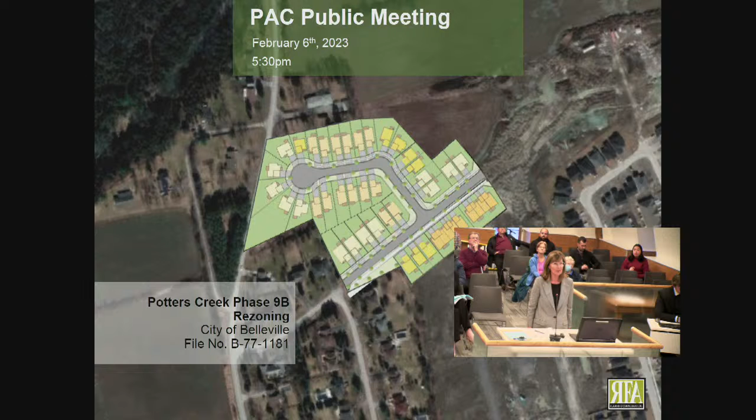I have a very brief presentation about this rezoning application, so I'd like to go through that right now. Potters Creek is a subdivision that was draft approved in 2008, and the rezoning is for Phase 9B, which is the very final phase of the original draft approved plan.

Overall in Potters Creek subdivision, there are just over 900 dwelling units, so it's a large subdivision. It's taken over a decade to completely build out. The rezoning for each phase has occurred, so there's been multiple opportunities and considerations by the Belleville Planning Committee for each phase as it's been built and proposed. Phase 9B was delayed because of the desire for an overarching traffic study for the West Belleville urban area, which occurred in 2021.

This land is within the urban serviced area of the city of Belleville. To the south and east are residential lots within the Potters Creek subdivision, where Phase 9A is now in the building process. To the north are lands to accommodate a future roundabout connecting Sienna to Avonlough. To the west are existing low-density residential uses, particularly the Hastings Park subdivision, developed by Sidney Township in the late 1970s with municipal water service supplied by the city of Belleville, and since annexed by the city.

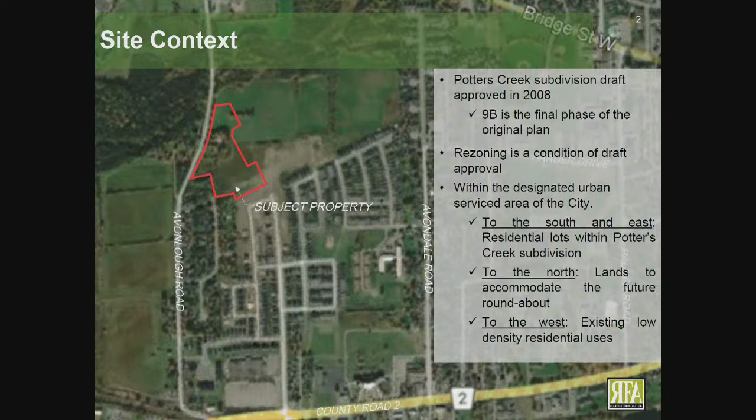There was a pre-consultation process reviewed by City of Belleville staff that occurred in the summer, and we filed the applications in November. It was deemed complete December 15th. The applications, as you've heard from Andrew, include a rezoning application and a red line draft plan of subdivision, which this meeting isn't really to hear about, but I do have information about the draft plan for the public and for the planning committee. We filed a planning justification report, a development site plan, and draft plan for those applications.

WSE Consulting also filed a series of technical reports requested by the city dealing with servicing, water and sewer, stormwater management, and traffic calming measures. There was also an overall traffic study done by Azura Engineers in 2021, which looked at both the Potters Creek subdivision development and the Avonlea development, a subdivision to the west extending towards Walbridge Loyalist Road and the Christian School. That's approximately 700 units, which has been draft approved and rezoned.

Turning briefly to what's proposed with the subdivision for Phase 9B: this slide shows the layout, with boxes representing building envelopes for single detached dwellings and some townhouse units. Originally in 2008, it was a smaller piece of land for 22 single detached units. Additional lands to the north have been added, essentially the entire cul-de-sac area, which is why we're amending the original approval. That's about 1.6 hectares added to make the subdivision larger. The new plan is for 44 units, 35 of which are single detached, so the majority are single detached homes. There are also 9 one-story bungalow townhouse units, shown in orange at the lower right corner, which will back onto semi-detached units in Phase 8 of Potters Creek.

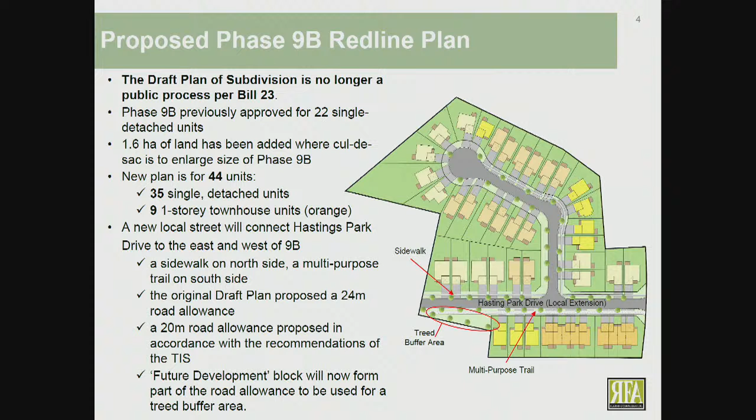WSE outlined a series of traffic calming measures in their report, summarized on this slide, as recommended in the traffic impact study. The connection of local street A to Hastings Park Drive is carried forward as recommended, and there's a new roundabout connecting Sienna and Avonlough Road to the north. The traffic calming measures are intended to ensure Hastings Park Drive within 9B remains a local road. As recommended by Azura, Hastings Park Drive will have a traffic hump or speed hump at the terminus of the new street before connecting to the existing Hastings Park Drive, along with speed control and stop control signs to alert drivers to slow down and stop more frequently.

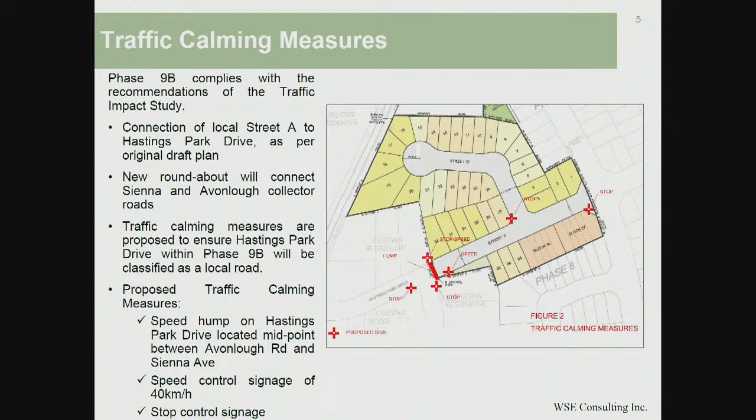Turning briefly to the provincial policy statement, which all rezoning applications must be consistent with: Potters Creek subdivision is within the Belleville Urban Serviced Area, which is to be the focus for growth and development in the city. There must be sufficient servicing available, which there is, as proven through the submitted engineering studies, with logical extensions from existing servicing in previous phases of Potters Creek subdivision to accommodate all required infrastructure. It is a logical progression in the final phase within Potters Creek subdivision, and it will contribute to the city's supply of approved land that is zoned and readily serviced for subdivisions.

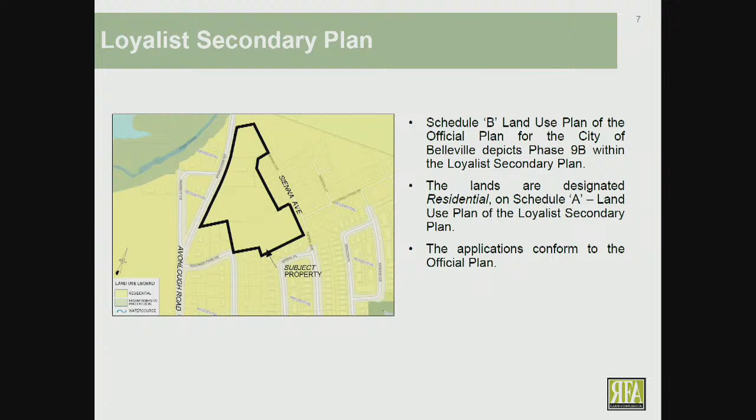We've worked with city staff to develop a zoning category that anticipates the provisions in the new City of Belleville zoning bylaw. As you're probably aware, the city has been updating its zoning bylaw for a number of years and is coming towards a conclusion of that process. They are creating new zone categories so that this land area under consideration for rezoning would fall within the terms of that proposed category.

This is an R3-X zone, which permits singles, semis, and towns. This also brings forward recommendations from the provincial government's Bill 23, including a new definition of townhouse dwelling. For those newer to the Planning Committee, the Belleville zoning bylaw dates from the early 1970s, and there's a lot of updating occurring, including a more modern definition for townhouse dwellings to permit various modern forms.

City staff recommended that some remnant parcels, which were in the old rural residential zone category, be contemplated for future development subsequent to 9B. There's an additional remnant about 1 hectare in size that will also be zoned within this same category, shown just to the north of the subdivision for 9B.

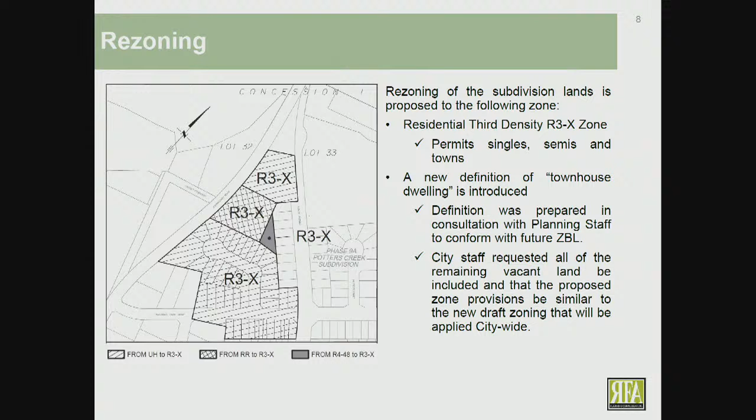We've had extensive consultation with the owner of 27 Hastings Park Drive, initiated on January 26th at City Hall. Some members of planning staff were able to attend; I myself was not there, but Adrian Bax, our client with Potters Creek Developments, was in attendance, and since that time we've been having ongoing discussions with the property owner.

I've been very involved in those conversations and emails back and forth, and I wanted to outline for the Planning Committee what was discussed at the meeting at City Hall, which has since resulted in some modifications to the draft plan of subdivision. Unfortunately, Adrian Bax is out of the country and wasn't able to attend, but he has been in touch and working with us throughout the process.

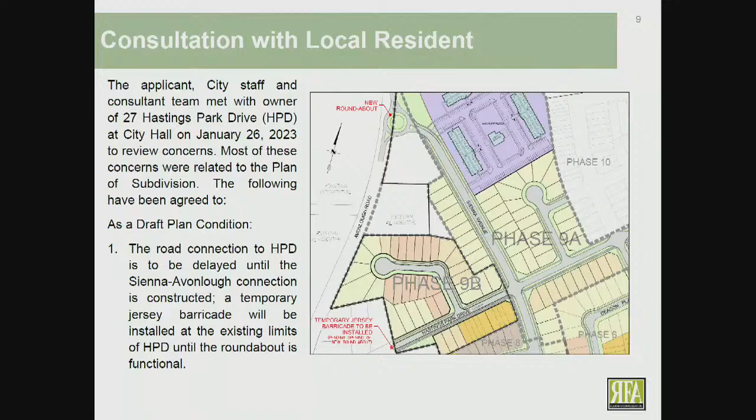There are other changes shown on this next slide, all related to the subdivision, which I thought would be beneficial for the committee to understand regarding agreements between the developer and the resident immediately abutting the subdivision. There's an easement on lots 22 and 23 that's agreed to be moved, creating more separation distance between the house on lot 21 and the corner of 27 Hastings Park Drive. There have also been adjustments to the rear lot lines in this vicinity, reducing the number of property owners abutting 27 Hastings Park Drive to two: lot 20 and lot 32.

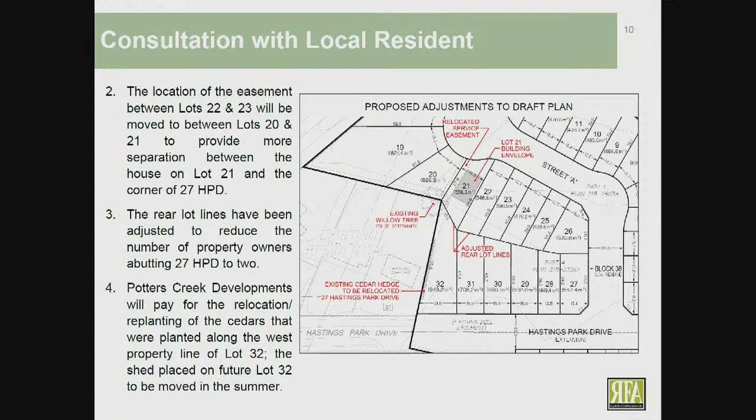They're both larger lots. Potters Creek Developments have agreed that they will pay for the relocation and replanting of cedars that were planted along the west property line of lot 32, and a shed there as well will be relocated. So those changes are all shown in red on that slide.

Finally, there was significant discussion about preserving an existing willow tree, and this is a detailed outline of what has been discussed. It's certainly the intent that the other changes will help separate the distance between the existing willow tree and the future dwellings on lots 20 and 21. The intervening space between those buildings and the tree would be backyards and gardens, which should not impact the tree. It was agreed, though, that an independent arborist would determine the location of the tree, its related drip line, and the current health and lifespan of that tree would also be established.

So this would occur this spring. And then the building envelopes in the adjoining lot would be staked out, and a mitigation plan would be formulated if warranted. If, in the opinion of the arborist, the construction activity related to the new homes on lots 20 and 21 abutting this tree would cause it to die, the developer has agreed that he will replace it with a 12-foot high conifer tree.

And then finally, there's some additional conditions related to future homes and future homeowners and pools in the backyards of lots 20 and 21. So those are things that were discussed, as you can see, in quite a bit of detail over the past week with that property owner.

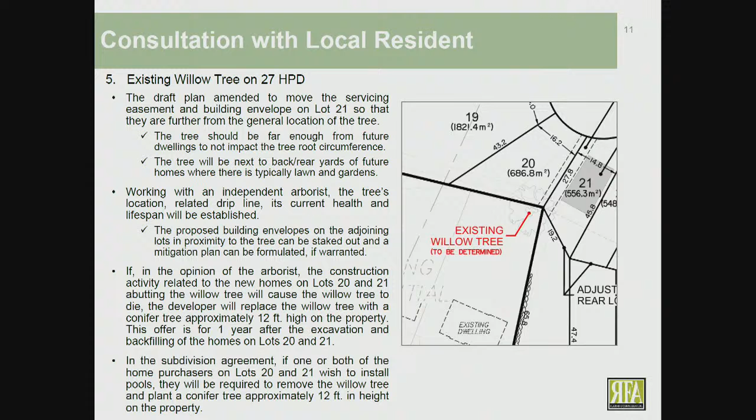Just wanted to conclude in summary that the rezoning is for the final phase of Potters Creek subdivision that was approved in 2008. There will be future phases to Potters Creek, but they will go through a separate subdivision process. This is for 44 residential units, primarily single detached dwellings. The rezoning is consistent with the provincial policy statement, it conforms to the planning policies of the Loyalist Secondary Plan, and finally, it implements the recommendations for the traffic study for the Belleville West community. That concludes my presentation. Thank you.

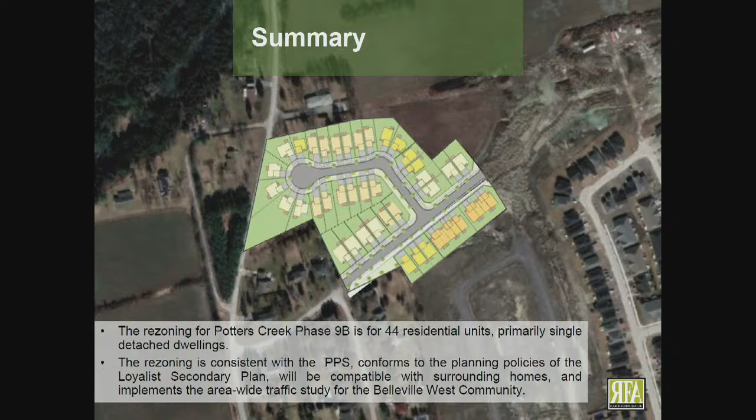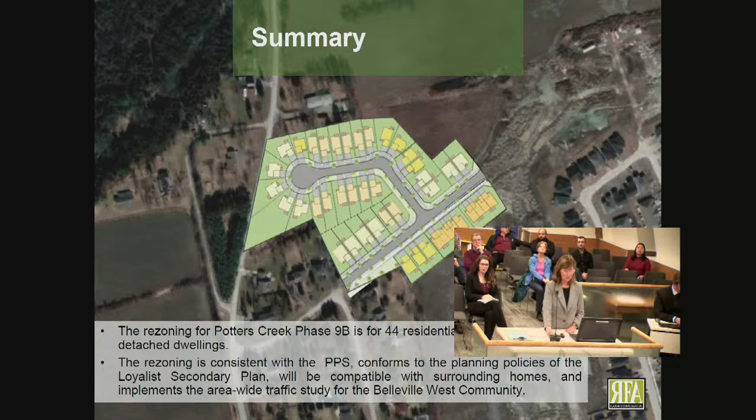If I may, I'm assuming, I hate to assume, but is it safe to say that construction access to this redevelopment would be off Avonlough Road, not Hastings Drive, as the big trucks and all that come in and out?

Just ask Adam Wilson to come up from WSE to answer that question. Yes, that's correct. The access would come off Avonlough. There's actually an existing construction route already to the north. We would leave it in place for the duration of this work.

Perfect, thank you. Councillor Millett. Thank you, through you, Chair Ruth. The traffic calming, proposed speed humps on Hastings Park Drive. We don't have speed humps elsewhere in the city. Has this been discussed with our staff that we're now going to create a policy whereby we're going to use speed humps?

That's a good question, Councillor Millett. And it's recognized that those don't exist elsewhere in the city. They were recommended in the 2021 traffic report. My understanding, and perhaps this is best directed through staff, is the city doesn't have a complete streets policy yet that would also deal with traffic calming. In our planning report and in the WSE report, we talk about traffic calming and different ways of designing streets so that they do slow down traffic. There are many, many ways that this can be done. Speed humps are one of many ways. At the end of the day, this was what was recommended in the 2021 traffic study, and in the absence of any more comprehensive city policy, it's one that can be done for, I suppose, at this point.

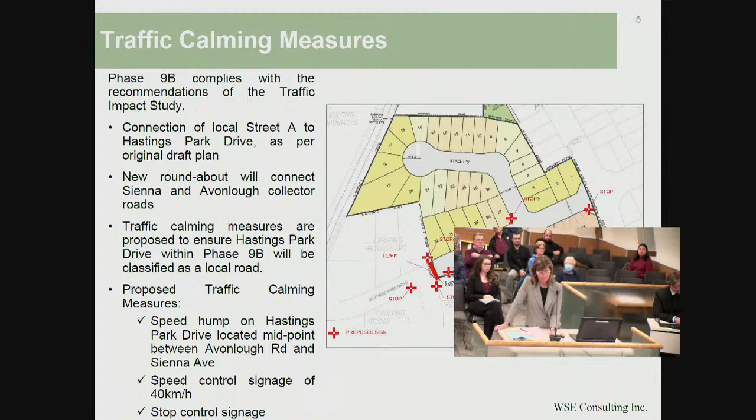Because in the justification, we're talking about trying to slow down and minimize the amount of traffic at that location. How critical is it to be opened up versus made into a cul-de-sac, a walk-through area, similar to what your developer did up in Settlers Ridge on Thurlow Drive?

I'm going to perhaps defer that to city staff. We are following the lead from city staff in terms of a general planning principle, the desire of the city here is to see connectivity between neighborhoods and not have a lot of dead-end streets. That's the key thing. This is to serve just the local immediate neighborhood, not intended to service the overall neighborhoods of Potters Creek and Avonlough. That's the purpose of Sienna, Avonlough, and the roundabout.

Okay, so maybe I'll defer that question. But according to the traffic study completed under your contract, stop signs are being recommended as a way to slow traffic. Now, I sit on our transportation committee, and the Ontario Traffic Manual is very clear that stop signs aren't to be used for the purpose of slowing traffic. They're there to control traffic and flow. So I'm curious why the traffic study would be recommending stop signs when that's contrary to what the Ontario Traffic Manual would suggest.

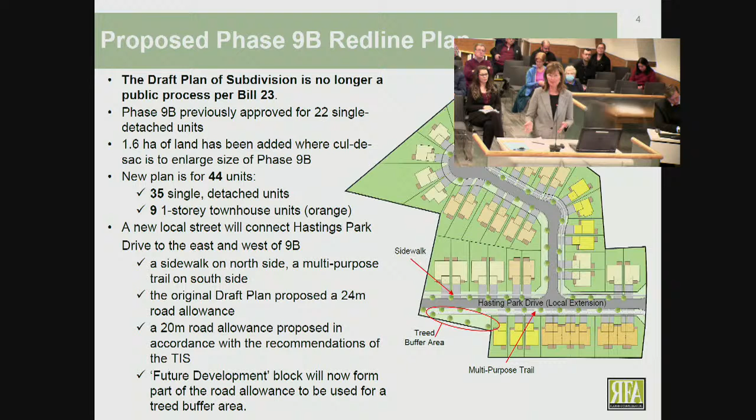That's also a really good question. As each subdivision is developed, you often would have a scenario where it may connect to an area that wouldn't have a multipurpose trail, but then the city would in the future provide that connection. As each phase of development is constructed, it's important those services be put in place, including the multipurpose trail, planned ahead of time. Then as the city, at whatever point it looks at Hastings Park Drive and provides services and road reconstruction, for example extending sewers there, at that time as the roads are reconstructed, they could then implement the multi-purpose trail through Hastings Park Drive.

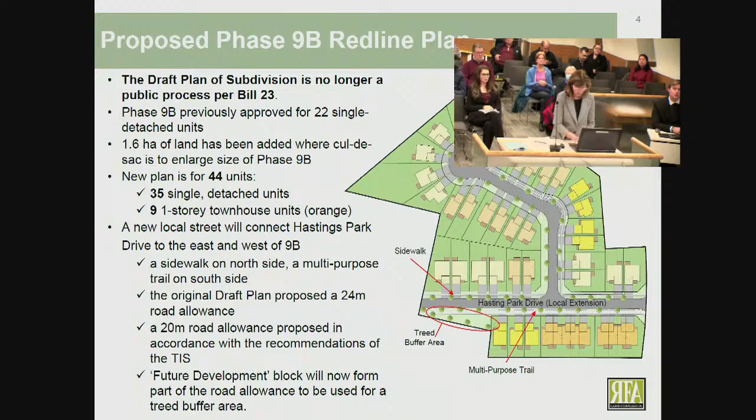Sorry, I'm just trying to exit here. I'll just keep running the meeting here. You can struggle with it. Anyone wishing to speak in opposition? Yeah, okay, sorry, I'm just getting out of this. Thank you.

If you could activate the microphone there and state your name for the committee, please. It's Christopher Destin, I'm the resident at 27 Hastings Park Drive. Opposition is a strong word. I'm not really here in opposition, but I'd like to make some comments.

I've been working with Potters Creek Developments and RFA planning over the last few weeks, and the meetings have been very productive and many concerns have been addressed. Those agreed upon provisions are detailed in the letter that I sent to you last night, and I've been told to become a part of the submission and part of the plan of subdivision.

As I understand it, the focus of these meetings could be restricted to only a discussion on zoning, as this is really just an application to change the zoning of these lands, and that there really is no official forum for the public to discuss concerns related to subdivision applications themselves. So I'm really appreciative and grateful that we still have a community that values public input and is willing to consider it, even if the regulations of our current provincial government no longer do.

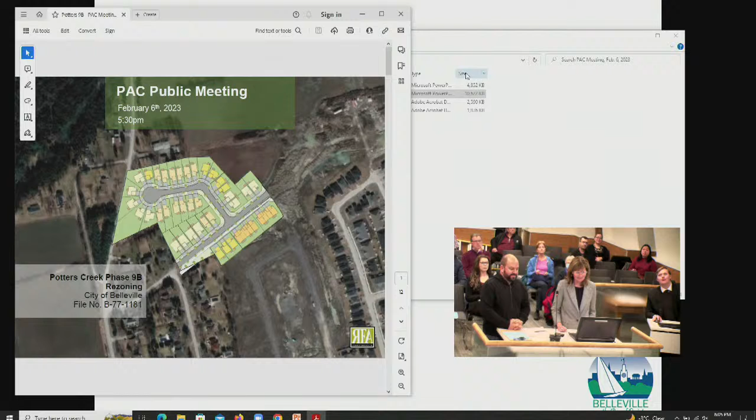Good evening, my name is Sebastian Mitzi. I'm principal with Signature Communities and Neighborhood Better Living. We are the owners of the site in front of you today. I just wanted to take a brief opportunity to say our group of companies celebrated 50 years on Friday, and we've been doing development and construction for many, many years. This project has a special place in our heart, and we're excited to be part of a team that can bring and fulfill something that is a real dire need in our province.

The second thing I wanted to say was I wanted to thank staff. In my 20 years of doing this business, I've never had the support that we've had recently from the City of Belleville staff. I'd be remiss if I didn't share that with the committee today. Other than that, thank you so much, and we're here to take any questions. Ruth will take over. Thank you, Sebastian.

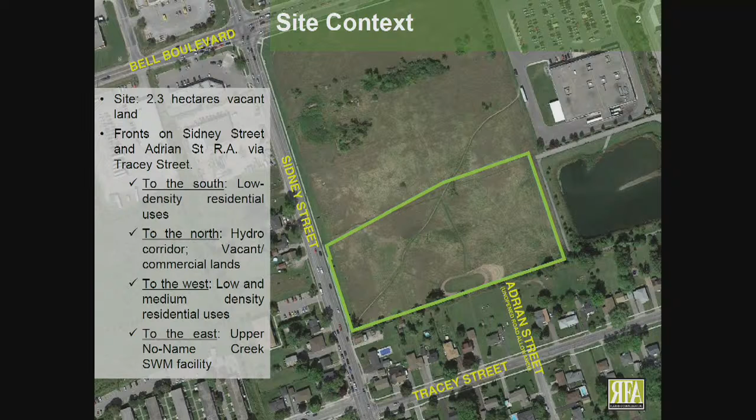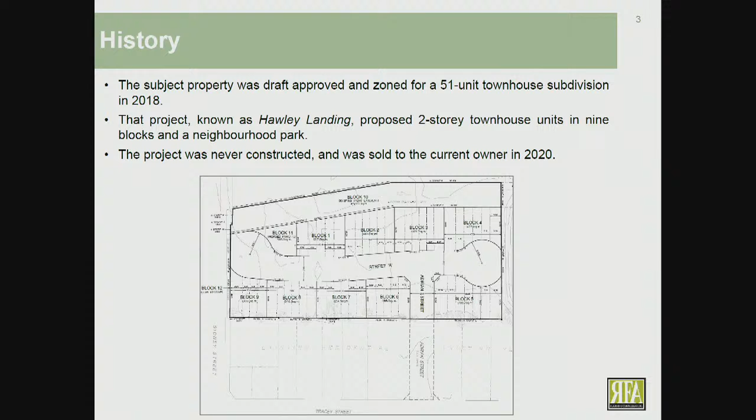As referenced, this was approved as a 51-unit townhouse subdivision in 2018. This is a picture of what that subdivision looked like—it proposed to extend Adrian Street, the unopened road allowance, and create a new east-west street from there. These were freehold townhouses. Adam and I were involved with that project, known as Hawley Landing, and the zoning at that time was also approved by City Planning Committee and Council. It was never constructed, and then Sebastian's company purchased the property in 2020.

That's how he came to meet us, and we were able to carry on and work with him on his new project. There's been a lot of pre-consultation, with the formal pre-consultation with municipal staff on August 3rd, 2022. We filed the applications just before Christmas, and they were deemed complete on January 4th. We also held a neighborhood information meeting on January 24th at the Parkdale Community Center.

This slide shows the draft plan of subdivision. It's not formally part of this public meeting process because of changes to Bill 23, but it shows how the land would be subdivided into various blocks—8 in total. It features a long-term care facility on Block 8, the larger of the blocks. There are 6 townhouse blocks fronting onto a condominium road and amenity space, which is Block 7. Then there's a parkland block, Block 9, the same as was previously proposed in the lapsed draft plan of subdivision.

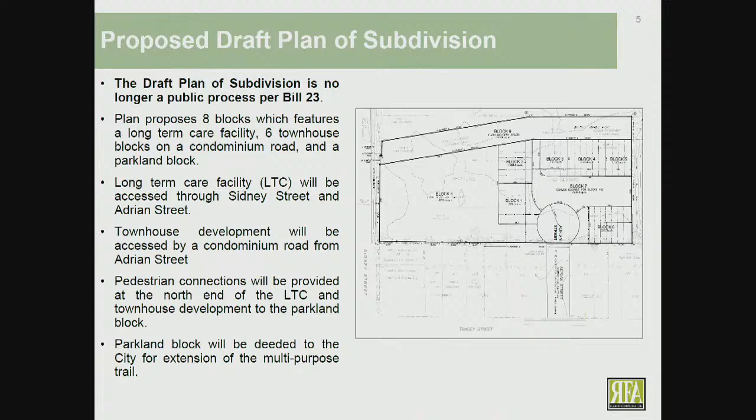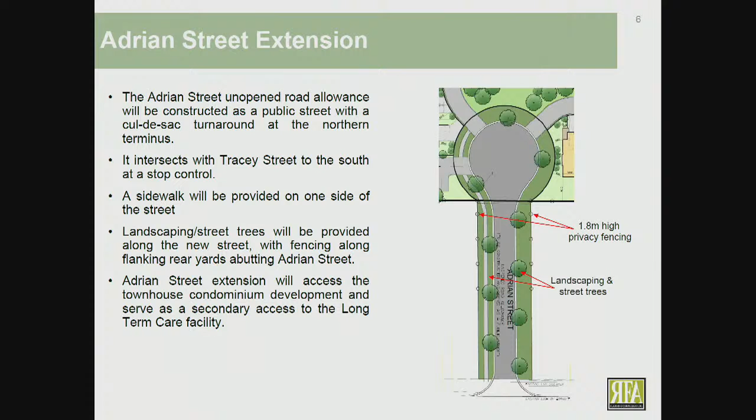This slide shows a detailed conceptual design for Adrian Street in the unopened road allowance. It'll be constructed by the developer as a public street with a cul-de-sac turnaround at the northern terminus, and a stop sign at the south end with Tracey Street. There'll be a sidewalk on the west side of the new street, connecting to the Tracey Street sidewalk and into the subdivision and long-term care block. There will be landscaping and street trees along the new street, and as with Hawley Landing, there's a requirement for 1.8 meter high privacy fencing extending down both sides of Adrian Street to flank the rear yards of existing homes. It will provide access to both the townhouses and the long-term care facility.

Just as background, this site has received approval from the Ministry of Long-Term Care to grant a license to Signature Communities to build this facility in Belleville at this site. As many of you are aware, there are approximately 1,800 people on the wait list in need of long-term care beds in Hastings County.

This proposed long-term care facility will house 160 residents in 5 different units, each with 32 beds. It will have 96 private rooms and 64 standard rooms, with private access to each room and a shared washroom. The physical design standards will incorporate space to accommodate unique medical equipment, such as piped oxygen, dialysis, feeding tubes, and bariatric equipment.

Universal Care Canada is the management company. They are an approved operator and will manage the facility, subject to Ministry of Long-Term Care approval. They have existing operations throughout the province, and this facility will result in a reduction in wait times for long-term care beds in Belleville.

This slide shows an enlargement of the long-term care facility site plan. We are working closely with the architect, Sam Esposito, who specializes in these types of facilities throughout the province. It's a 5-story building with 160 beds, shown in the orange rectangular block, positioned at the north end of the site near the future parkland and close to Sidney Street.

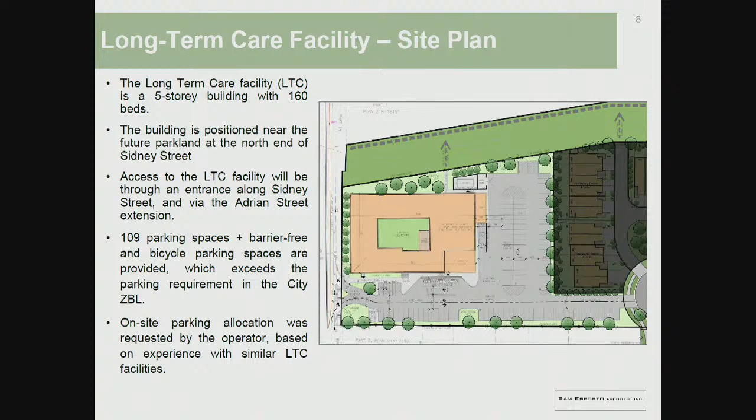Access will be through the entrance on Sidney Street, as well as to Adrian Street to the east. There are 109 parking spaces, including barrier-free and bicycle parking spaces. Overall, the parking supply exceeds the requirements of the city's zoning bylaw, based on what the operator requires for similar long-term care facilities. The building will also screen a lot of the parking from the public road.

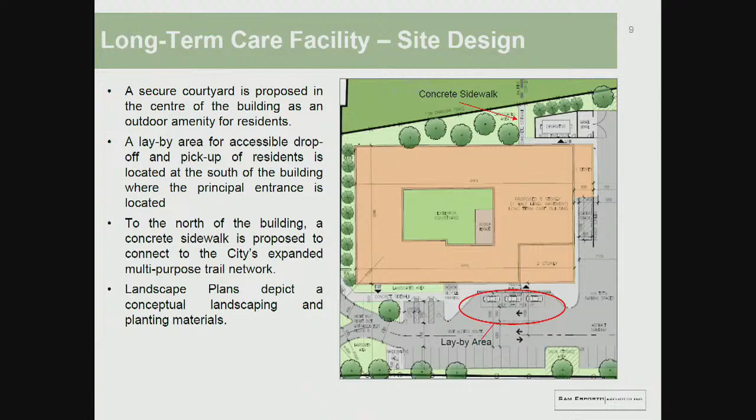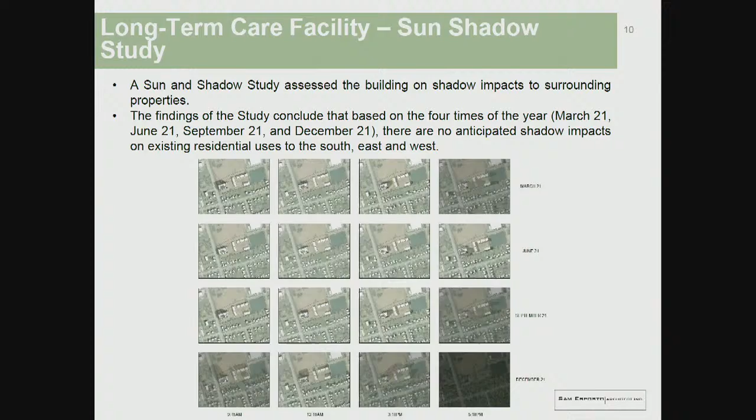There's also a requirement for an angular plane review, provided for in the Belleville new official plan, which is not yet approved by the province but has been adopted by council. This angular plane requirement applies from the side lot line where it shares with existing single detached residential development, with the line drawn at the lot line meeting a minimum angle of 45 degrees from vertical. The angular plane was drawn to the southerly property line at 45 degrees, and the placement and height of the building meets the planning criteria in the new official plan and is deemed appropriate.

In addition, to ensure the angular plane is implemented, there will be a 20-meter setback from the south lot line in the zoning bylaw.

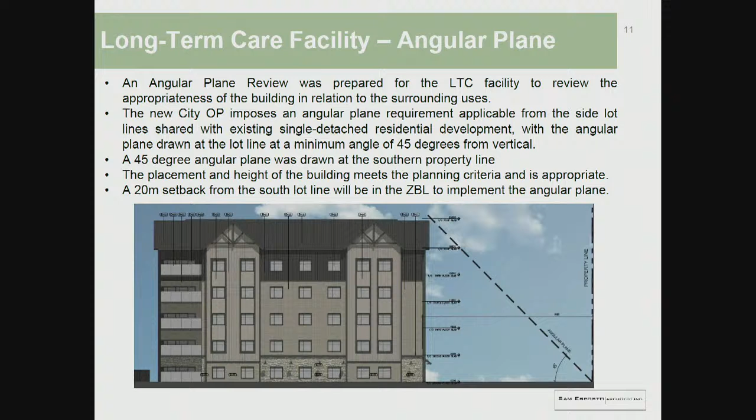This slide shows some of the elevations that the architect prepared, intending to create a building with residential character, maintaining a pitched roof, and utilizing building materials such as siding and stone cladding.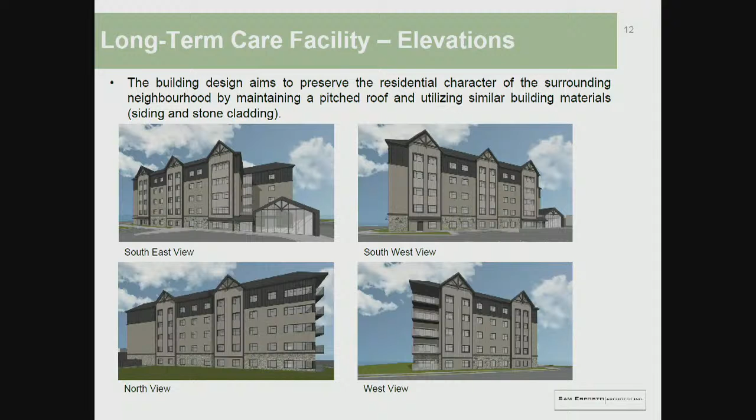Turning now to the townhouse development, Signature Communities will be the builder and developer of the townhomes. There are 34 two-story units proposed in 6 blocks. All units will be 3-bedroom units with 2 parking spaces, one in an attached garage. They are accessed by an internal condo road, which also includes visitor parking and amenity space, with a connection to the park block to the north at the end of the road.

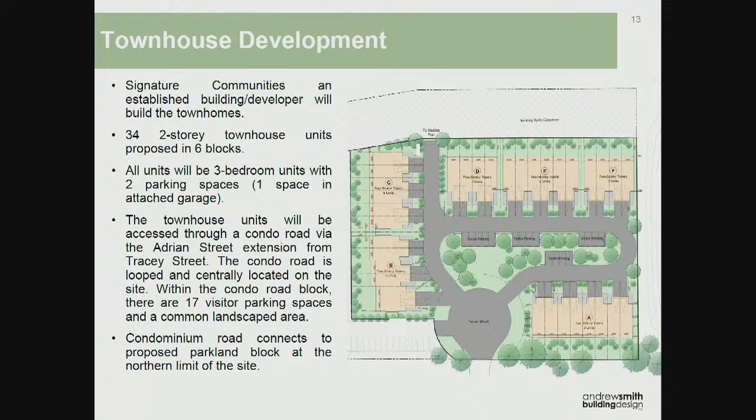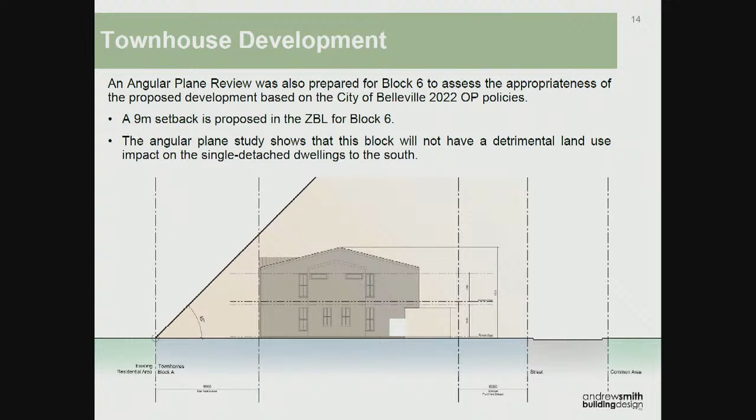Again, as with the other application, we've reviewed the provincial policy statement, and it is in the Belleville Urban Serviced Area where growth and development is to focus. It has full municipal services, which is the preferred method of servicing. It's designated residential, permits a mix of densities, and a variety of public uses are in proximity to the site. Our conclusion is the rezoning is consistent with the 2020 PPS.

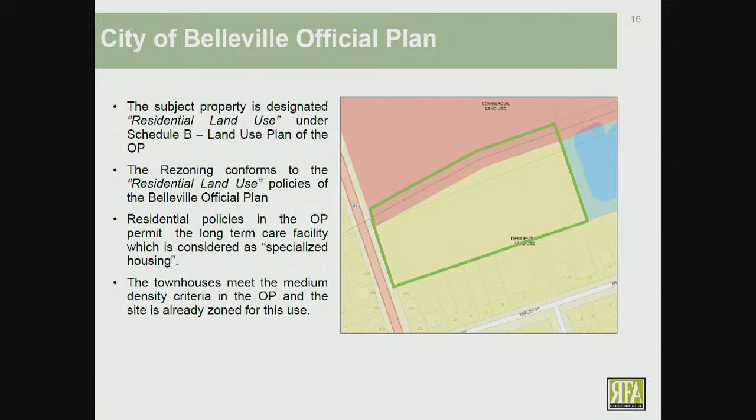This slide shows the Belleville official plan designation. The yellow is the residential designation, and it falls within that designation predominantly. The open space block—the pink—is commercial. It conforms to the residential land use policies of the Belleville official plan. In the official plan, specialized housing includes long-term care facilities such as nursing homes and retirement homes, so that falls within the residential land use designation. Finally, the townhouses meet the medium density criteria in the official plan, and the site is already zoned for townhouses.

These mainly deal with FSI, the floor space index. It's slightly more intense than what's in the existing Belleville zoning bylaw, which applies an FSI of 1. We're asking for 1.5, still not at the upper range. There are also some setbacks being requested so the building can be closer to Sidney Street than what's in the current nursing home zone, plus some other special architectural relief on setbacks.

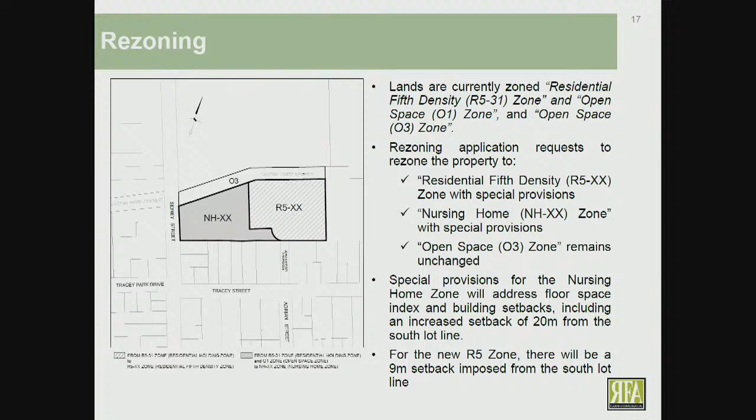There's also going to be a 20-meter setback for the nursing home zone from the south lot line to ensure the angular plane is implemented. And the same for the R5 zone—there'll be an increased setback to 9 meters along the south lot line.

As referenced, there was a neighborhood information meeting on January 24th held by the consultant team and the applicant at Parkdale, and there were 9 residents that attended the meeting. We've tried to very briefly summarize the comments, concerns, and responses.

There was a lot of concern, as I understand it, about Adrian Street, south of Tracey Street, as a result of some of the previous construction. I'm sure you may hear about some of that—I saw one of the written comments too about concern about the condition of Adrian Street.

There were questions about the form of the townhouses and what they would be like, so we had drawings there to show the residents that they are 2-story townhomes.

About the fencing along Adrian Street—this was a condition on the previous subdivision plan, and that will be carried forward to ensure there's privacy fencing along Adrian Street, so the abutting homes on either side have privacy in their backyards.

Drainage: there's a stormwater pond, as you saw on one of the first slides, for the Upper No Name Creek. This site will be designed so all storm flows go to that existing pond, which was sized for this particular site. Finally, there was a question about construction traffic, wanting to make sure it's directed away from Adrian Street.

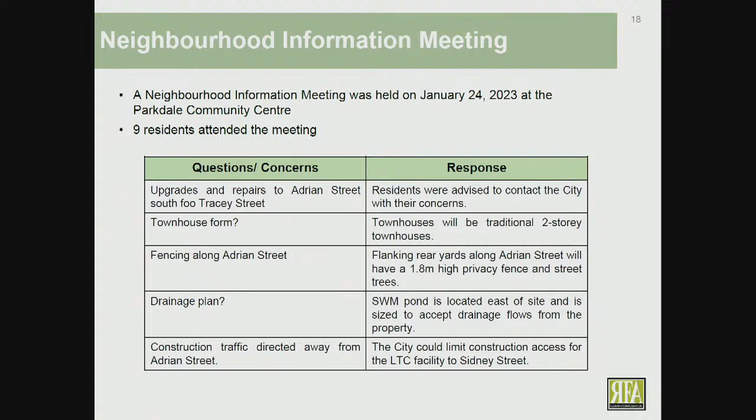There was also a comment with respect to a transformer from Habitat for Humanity, and this is a site plan detail. The transformer will have to meet municipal bylaws with respect to noise. There is a privacy fence that will be constructed along the property line, and the mechanical electrical engineer on the design team will be reviewing that further and providing further comments to the city.

That concludes the presentation for the rezoning. The rezoning itself will facilitate the approval of a long-term care facility that is needed to help serve the city's aging population. It is very similar to a rezoning that was previously approved for townhouses on this site, and there have been adjustments to the zoning to accommodate the new proposal in terms of the built form and function of the townhouses, and of course the new long-term care block.

Thank you. Okay, thank you. Any questions from committee members?

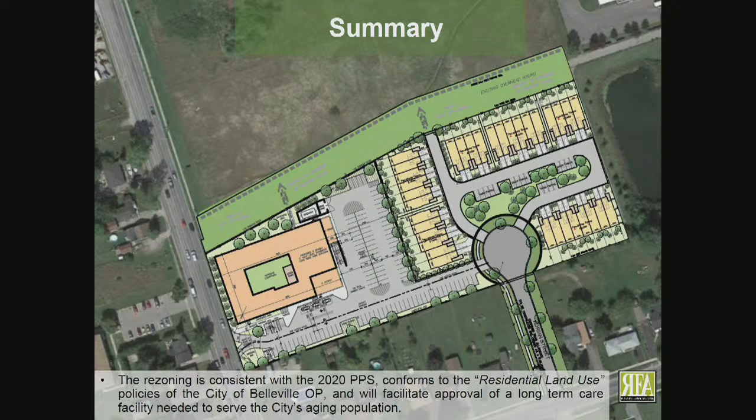No, I just have one similar to the last one. So we're looking at 34 townhouses, which is great. Again, adding to the supply. My question is if all approvals are set, what do you see for timeline, or what does the applicant see for timeline on construction?

I'll ask Sebastian to answer that. Sure. So in terms of the long-term care home, we have funding that is tied to a construction start in August of this year. And with all the approvals in place, we would commence construction and sales and marketing program on the townhomes at the same time. That would be our plan. That's very good. Thank you.

Thank you. Okay. Any other questions? No? Okay, thank you. Anyone else wishing to speak in favor of the application? And finally, a third time, anyone wishing to speak in favor of the application? Anyone wanting to speak in opposition of the application?

Anyone? Yeah, come on forward. If you could just activate the microphone and state your name, please. Just activate it, if you press it, it'll light up. There you go. Okay, thank you.

I'm a resident of 12 Adrian Street. My name's Ivan Emelianenko. I could speak for two other people who live at the same residence. Our main concern is with the construction happening near to us, with the noise and the traffic that will be prevalent for the next year and a half, or however long this construction is going to take. But as I've lived there for 15 years, the street has never been repaired properly. Year after year, there's been pothole repairs.

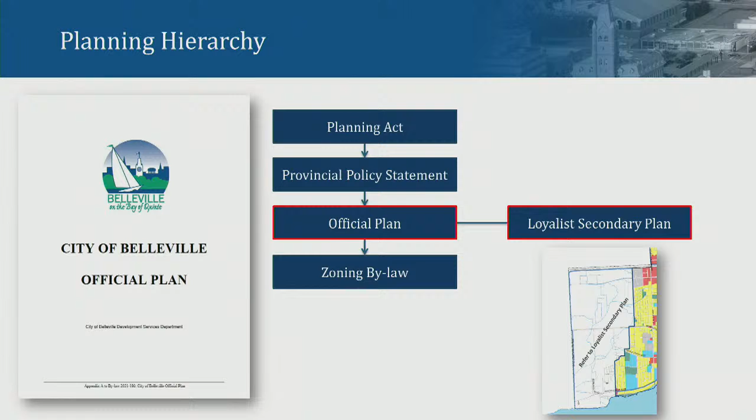So how do we implement the policies of the official plan? That's where the zoning bylaw comes in. Often people will refer to the zone as the primary, but it's really the official plan that spells out whether you're residential. It's the zoning bylaw that really provides the rules on what you're allowed to do.

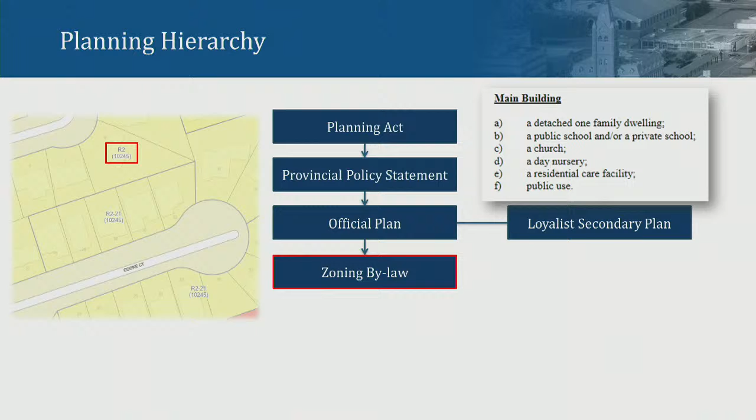For example, in this image here, you'll see the R2 zone. This is residential second density in the Belleville 10245 bylaw. That allows for a number of permitted uses shown here. And within the R2 zone, there's also general provisions for each one of these uses. So for example, a single detached dwelling will have these general provisions that they are meant to comply to.

So any property zoned R2 that is permitted a single detached dwelling, if someone wants to build that, here's the rules that they have to follow. It includes minimum frontage, lot area, setbacks, lot coverage, and building height. So if a property does not meet these special provisions for that use, they may have to amend it, or they may not be able to do it.

When it comes to an amendment, you may see an exception zone or a site-specific zone, as we refer to it sometimes, such as the R2-21 zone. This is an example where they had properties that they wanted to amend some of the provisions of the R2 zone. So this R2-21 amended the front yard depth and the lot coverage. So this effectively amended the provisions right in that R2 zone. So lands within the R2-21, they follow all those rules except for front yard depth and lot coverage.

This is one of the most common rezoning applications that you will see. They're quite minor, but sometimes they can be quite complicated. It can be not just two, it can be many, or it could just simply be one.

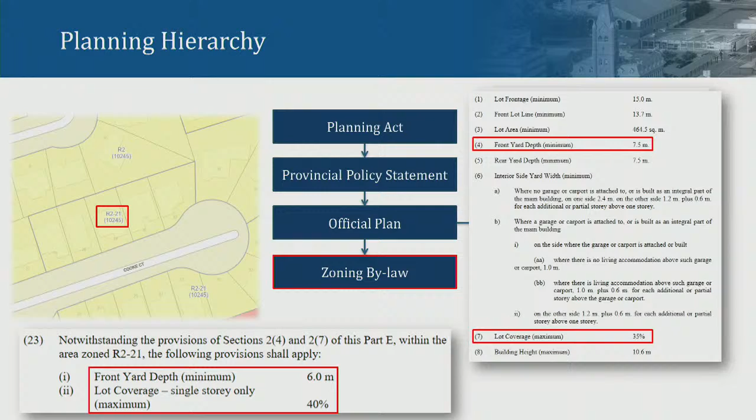Another type of amendment that you will see is a change in zone. So whether that's an R2 to perhaps an R4 zone, or an R2 to a commercial zone, or the question may come up of an industrial zone. So when we look at those changes in the zone itself, that's when we really have to look at the relationship with the official plan.

This section here is North Front Street. You'll notice primarily up along North Front you have commercial land use, and to the east and west of it you have residential land use. This is the official plan land use designation, so we have these policies that dictate this is the area for commercial, residential. But beyond that, when we start looking at what types of development are permitted, whether it's single detached or townhouses, that's when the zoning bylaw comes into play, and you can see on the same area that it really starts breaking it down into different zones, which all have various rules.

So an R2 zone might be single detached dwellings, and R5 might be townhouse dwellings, and R7 a high-rise apartment building. Depending on the situation, depending on the land, when they rezone the property to permit their development, they may need special provisions to accommodate that. Maybe it's an amendment to the lot area, etc. So again, that's where we look at the official plan.

We look at, okay, is this the appropriate density for this area? For example, if they're proposing an R8 zone, is it on a collector road? Is it on an arterial road? So that's when we, again, refer to the official plan policies.

If it's a change from residential to commercial, again, we look at what the land use designation is. Some exceptions you'll see on here are some of the community facility zones popping up, highlighted in blue. There are uses that kind of bounce in between. Again, that is what the official plan spells out - it's your permitted uses, and then we find the appropriate zone category.

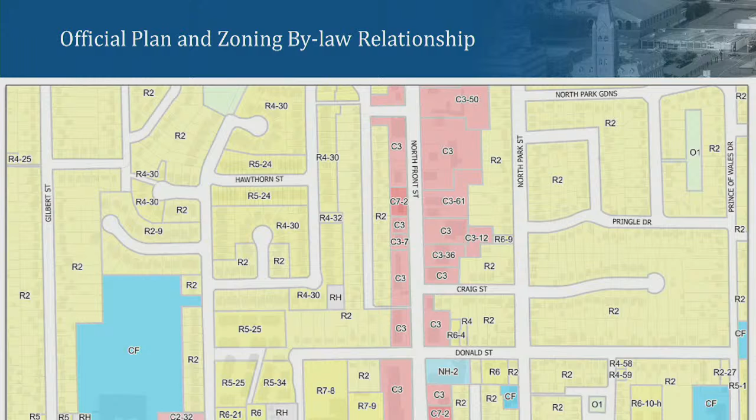This may be just with planning staff. Often for larger applications, it's with our full development review team, which incorporates staff from our transportation operations department, our environmental services department. Really, we try to get as many staff involved in that to really flush out any issues that may happen. And as planners, we're somewhat of the jack of all trades, master of none, maybe outside the zoning bylaw. So I don't pretend to be an engineer - I like to get an engineer's opinion on it.

So from that pre-consultation meeting, as we evaluate their proposal, we start by looking at the official plan. Is this possible here? But how else can we address that? Is there servicing capacity? We may need a functional servicing report. Is there traffic concerns? We may need a traffic impact study. So these are things that we look for early on, and we identify that to the applicant as what they will need for a complete application.

Once the applicant has done the work and provided those documents and justified their application, they submit it. We have 30 days as spelled out in the Planning Act to accept that as a complete application. Once it has been accepted as a complete application, we really start our processing portion of it. And again, this goes back to the Planning Act.

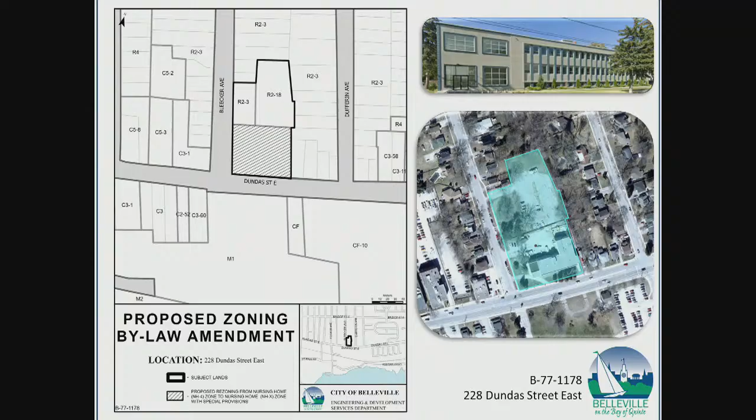Item 7.2, staff recommendation report for proposed zoning bylaw amendment, bylaw 10245, northern portion of 40 Yeomans Street, City of Belleville. Owner is 2749275 Ontario Incorporated, agent is RFA Planning Consultant Incorporated, file number B-77-1179. The resolution is that the Planning Advisory Committee recommends to City Council that application B-77-1179 to amend City of Belleville zoning bylaw number 10245 as amended, for the northern portion of 40 Yeomans Street, be approved as follows: that zoning bylaw 10245 be amended by modifying the residential 8th density R8-2 zone to only permit a 10-story apartment building with special provisions for lot frontage, exterior side yard, parking setbacks, parking requirements, bicycle parking requirements, landscaped area, and building height; and to rezone the eastern portion of the subject land from R8-2 to residential 5th density R5-46 zone to permit 25 townhouse dwellings with special provisions for yard depths, building height, parking setbacks, private amenity area, communal amenity area, and fence height; and that a holding H symbol be applied to the zoning to require site plan approval, as well as completion of the necessary supporting documents to the city's satisfaction prior to development of the subject land.

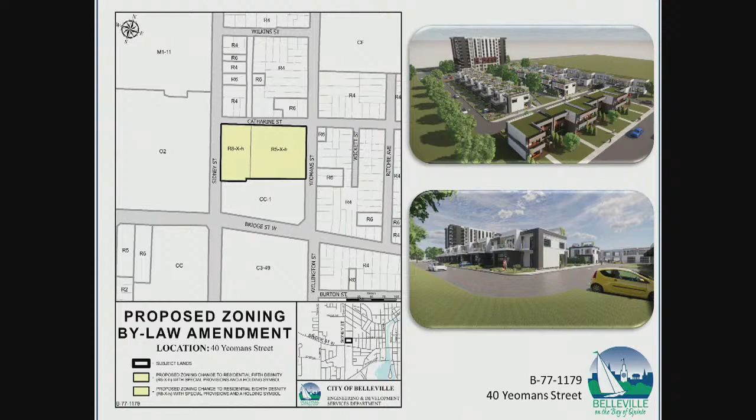Councillor Brown, Councillor Millette, any questions or comments on this one? The only thing I will say is that by splitting this up, as was suggested in the previous meeting, hopefully we can see development. It's discouraging when we approve zoning and then it sits. Housing supply is critical, and we'll certainly be monitoring the development that occurs there. All in favor? That's carried.

Item 7.3, staff recommendation report for proposed zoning bylaw amendment, bylaw 3014, 452 Clearview Road, City of Belleville. Owner is Greg Hagerty, agent is Frontier Homes Quinte, file number B-77-1180. Resolution is that the Planning Advisory Committee recommends the following to City Council.

That zoning bylaw number 3014, as amended, be amended by rezoning the subject property from rural RU9 zone to rural residential RR zone and rural residential RR-74 zone, with a special provision to permit structures existing at the time of passing of the bylaw to be permitted in the front yard, and to facilitate the creation of 2 residential lots.

Mr. Jennings, Mr. Baltutis, questions or comments? All in favor? That's carried.

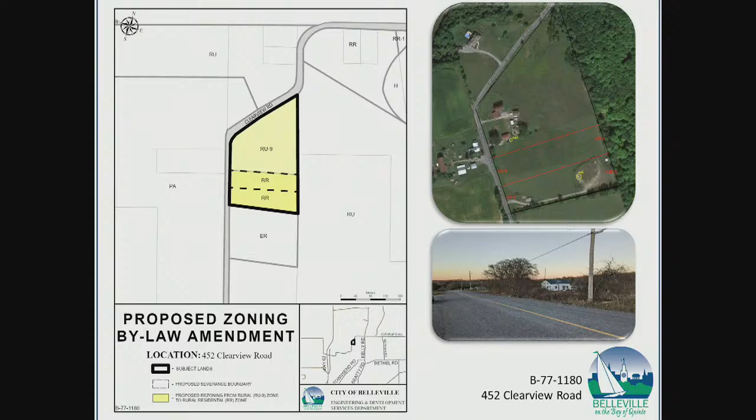Item 7.4, staff recommendation report for proposed zoning bylaw amendment, bylaw 3014, 466A Airport Parkway, City of Belleville. Owner is Brian Reed, agent is RFA Planning Consultant Incorporated. File number is B-77-1130. Resolution is that the Planning Advisory Committee recommends to City Council that zoning bylaw amendment application B-77-1130 respecting 466A Airport Parkway, City of Belleville, be denied.

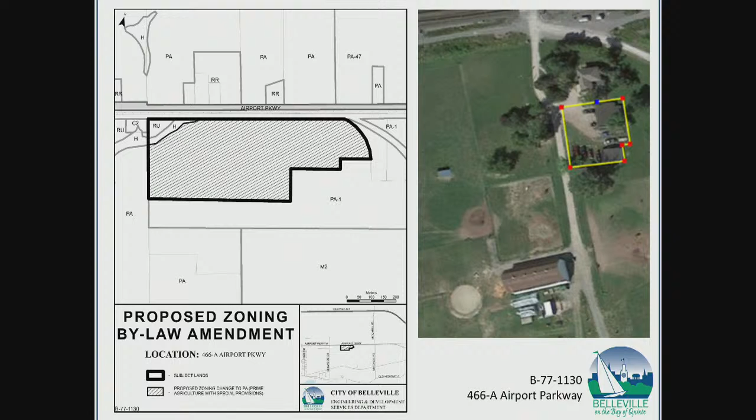Moved by Councillor Brown, seconded by Councillor Malette. Any questions or comments? Councillor Malette: Yeah, this one, I have no qualms in supporting denial of the application at this stage.

We received an awful lot of correspondence in the meantime about delays on behalf of CN Rail, alleged delays in responding. But at the end of the day, I think the overriding safety issue, as it's been presented, and the fact that it isn't conforming to the official plan designation - there are just too many things that don't fit in this regard, and I just can't get behind this.

Not the least of which, I recall when that fatal accident happened during the construction of the third rail in this area - that is a pretty scary crossing. When we increase the traffic to include horse trailers, more traffic, it just sets off warning bells.